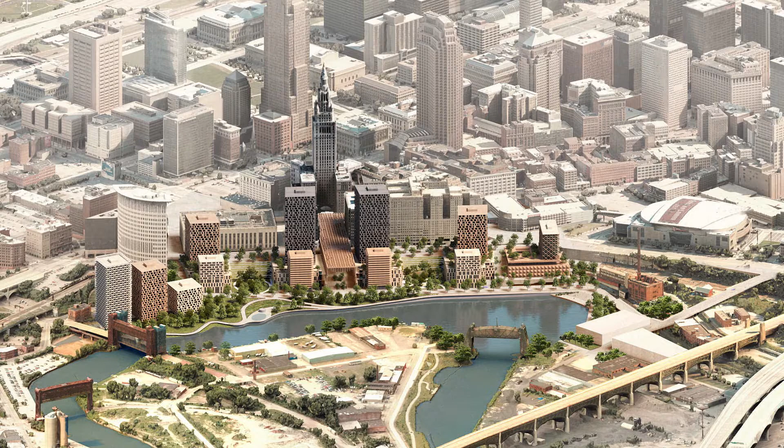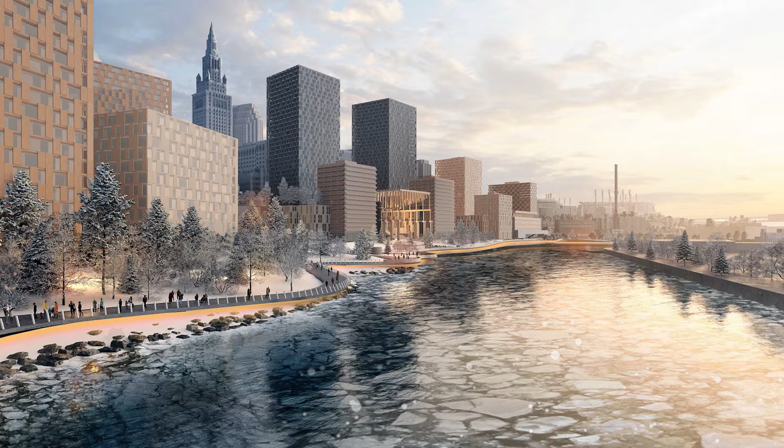I'm Jay Farner. I'm the CEO of ROC, which is the family office and support organization for Dan Gilbert, as well as the CEO of Rocket Companies. I've spent some time in Cleveland and had a great experience, but today is probably one of the most exciting days outside of that NBA championship, which is pretty good as well.

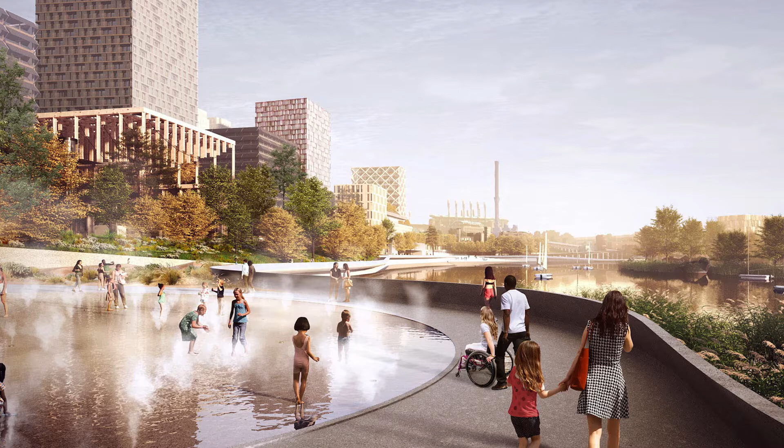As you probably know, our mission and Dan's mission is to make sure that we're having a positive impact on the communities where we live, we work, and we play. When I think about today and everything we're going to be talking about, that strikes exactly on our mission. We also have something called isms, if you know Dan - they're our philosophies that we live by. One of the most important is that you'll see it when you believe it. And as these gentlemen go through the plans for the riverfront, I think we'll all really start believing what the next phase of Cleveland looks like.

We've had a lot of excitement here since I can remember coming down in 2006 to set up our first mortgage office and recognizing how great of a city this was. As I referenced before, the NBA championship, the work we've done at the Higbee building and Tower City, but this certainly marks the step into a whole new transformational opportunity for us.

As you probably also know, we're doing some heavy development in Detroit. We've started and are on our way to building the second largest building in the state of Michigan, the Hudson's Tower. And as Dan likes to say, we are Lake Erie-centric, so Detroit and Cleveland are places that we like to be. Two great American cities, great DNA, smart, hardworking people, and these types of developments in these cities are long overdue.

But the reason I wanted to come down here today and speak with all of you and kick this off is that projects like the Riverfront Master Plan don't just happen. They are a result of a lot of hard work, not only by our Bedrock team, who I see many members of here today, but by so many other people that are in this room.

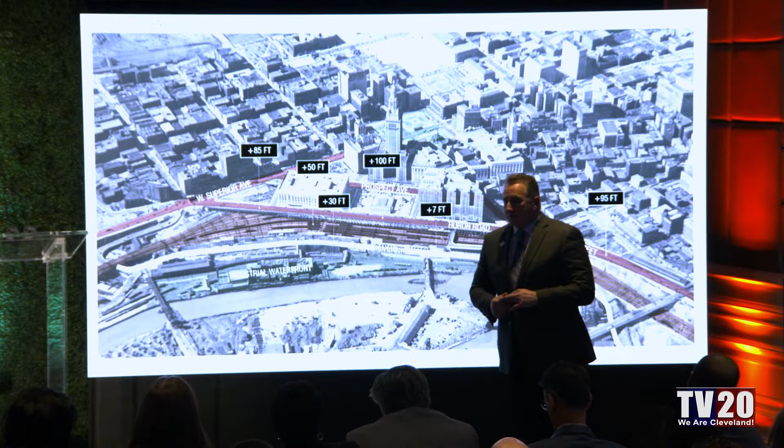And then lastly, as Russell mentioned before, you've got a lot of elevation challenges. You're starting out at plus 100 all the way down to plus 7 - those are elevations above the river level, so you're talking about 93 feet of elevation difference. Those are all challenges, and they set little platforms. You can see all the elevations marking up those little levels. Next slide.

So I think when we start, again, at that shore to core concept, you can see the federal channel. It is a federal channel, so we have to respect that. And then we have the bulkhead. It's still that industrial bulkhead, so we're going to look to improve that.

As you make your way up onto the site on this sectional view, you come into the parking lots and those industrial areas. Then you make your way to Canal Road, and Canal is a heavy truck traffic area, so that creates an obstacle there. As you're making your way further up, more parking lots, until you get to some of the core assets like Tower City, some of the parking lots, those assets, and then making your way further past Prospect, and then all the way to RTA, and then kind of the rest of that core area.

So that really defines the existing. Thanks, Jeff. Next slide, please.

So as we start to think about the 18-hour city and the 15-minute access, pulling a bit from what Joe just mentioned about the constraints with the infrastructure that exists now, I think we start looking at opportunities, right? As we looked at the communities and neighborhoods that make up Cleveland, we started to think, now we're coming into looking at our site, and what are some of these assets that we can use to help develop the 18-hour, 15-minute city?

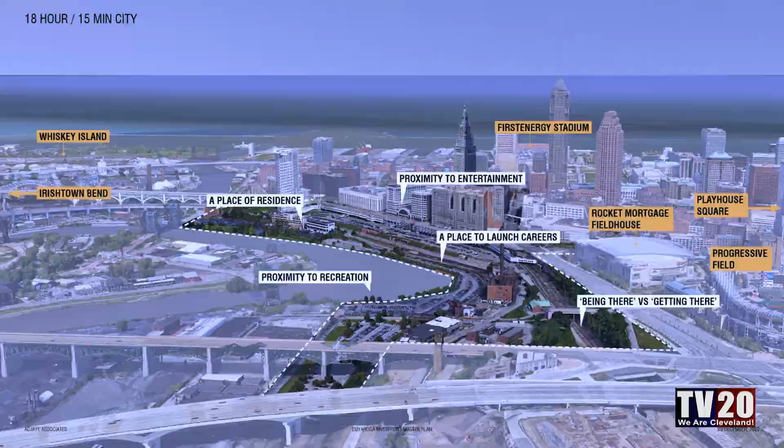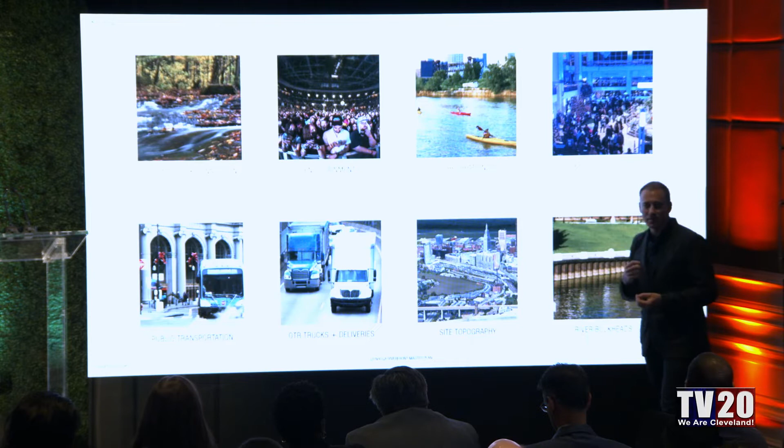Next slide, please. So on the top, I hope these are images you all recognize, but these are those assets, those places that you go to in downtown Cleveland. The national park is probably a bit out on the towpath, but these are places you all know and experience on a day-to-day basis. It's the fundamentals we're talking about here that we want to really explore and develop further. These are the opportunities we believe we can start looking at as we move into the next century.

And that starts with public transit, right? Can we start to really think about the RTA that exists in Tower City now, and then also the surface buses, and start to make better connections and decrease congestion, but get more and more people to come into downtown and create an epicenter that actually flows out or flows in from that moment? Strengthening that. I think the other thing is to really think about the commerce, the infrastructure of moving goods throughout the city.

We recognize Whiskey Island as having a port and the idea of what it means for leveraging the lake. How do you start to really think about where trucks are going to go and how that's going to work for the future? But then also thinking more at the neighborhood scale of FedEx and Amazon - where do those trucks go?

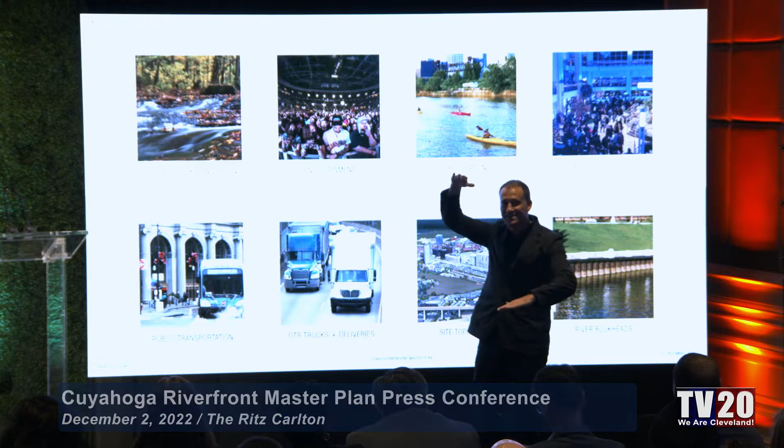How do they service and work through and not create barriers within the neighborhood? All while acknowledging the site topography, as Joe mentioned, going from 7 feet to 100 feet, we have a little constraint. But you can start to think that maybe we can really leverage that with the building and the developable parcels.

So that takes us down to the water's edge. And if we just start at our basic movement and think of 3,000 linear feet of bulkhead on a federal shipping channel, if we can start to make a change there and develop that, that should be our starting point to head back up to the top of the hill, which is the core, right?

So the shore to core principle that you all were part of in the vision for the valley, we think there's a strong part that we can pull off of that. Next slide, please.

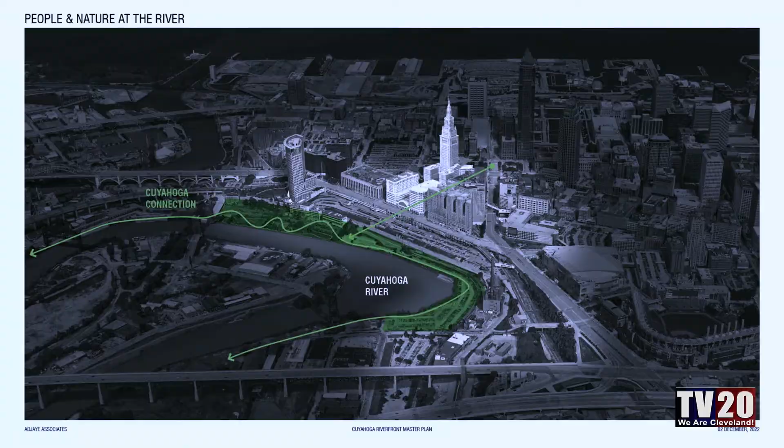What we're thinking is, let's make this a destination. So redevelop that federal shipping channel, maintain transportation infrastructure, but now to really start to think of that as public space, right? The idea of rebringing nature back into downtown not just as little segments or little zones, but really enhancing this to say 10, 12 acres of public space on the water.

And then using that as a moment to rethink Tower City. Using that to rethink Tower City and how do we turn Tower City as it is in retail and commercial, but maybe it turns a little bit more into what I'm going to call infrastructure.

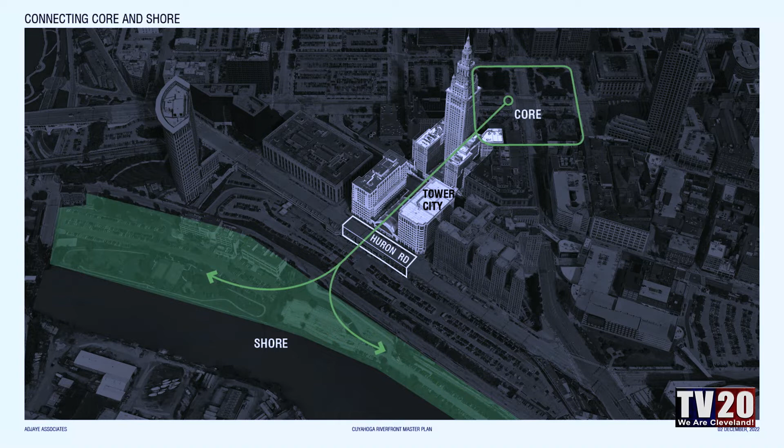And as the RTA, we develop connections with the RTA and the buses, now we have more public transportation coming through the building and more access that could occur from the shore up to the core, to the economic center. But with that, you can see we've identified here just that one obstacle that seems to be there, which is Huron Road, right?

As you leave Tower City now, you come out and it's the nice arch right onto Huron Road, and then there's the barrier of getting down, right? You can see the water, you just can't touch it.

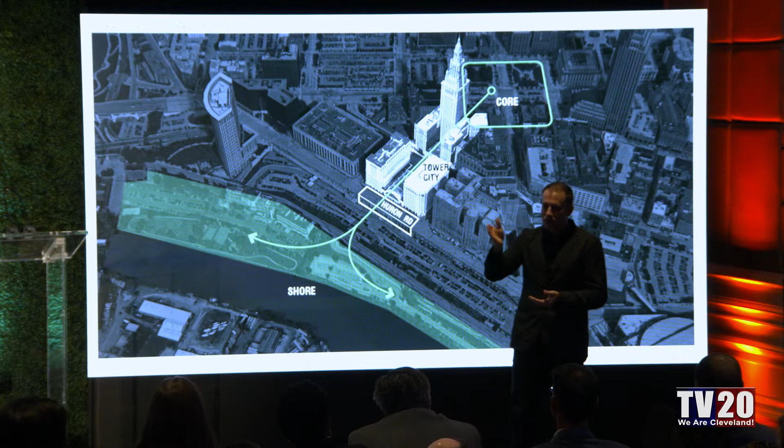So we've identified that as sort of a knuckle in establishing the basic premise of core to shore, shore to core, but really Tower City is going to be so critical to how we move this forward and rethinking its relationship to the ground. Next slide.

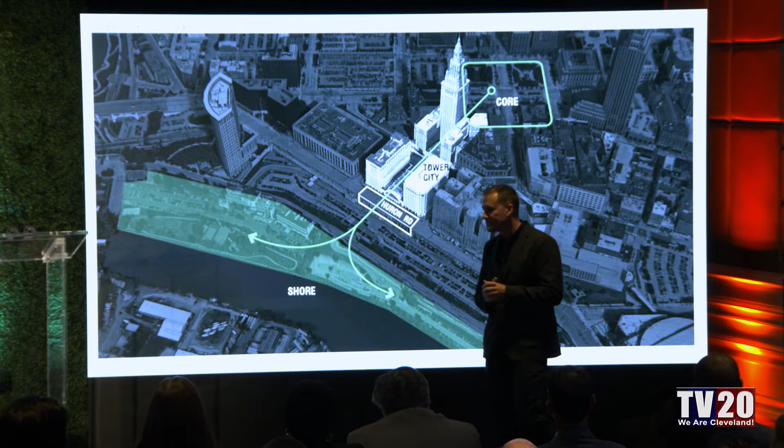So with that, David, going to hand this over to you. I'll be here. Perfect, and I can point to anything you want. Wonderful, thank you Russ, that's perfect.

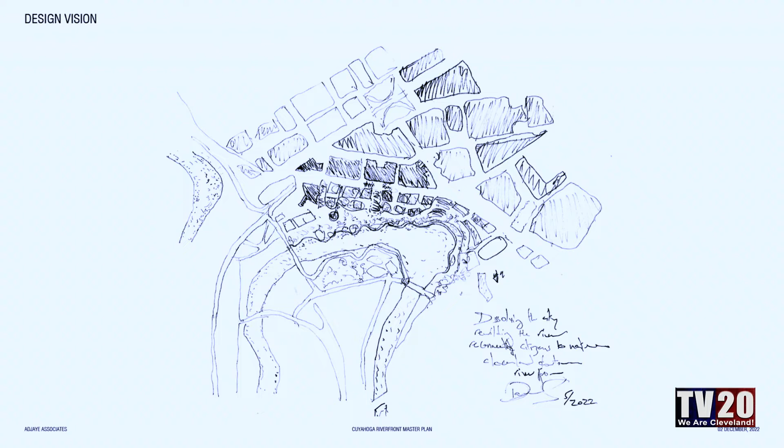So let's move to the next slide. So on the basis of what you've just heard as the framework and all the challenges, we started to really imagine this incredible opportunity, really this riverfront as an incredible opportunity to reimagine a 21st century downtown and a relationship to a river. And we felt that to really achieve the agenda of creating an 18-hour, 15-minute city, mixed use, commercial...

Residential, entertainment, culture, sports - to really create a microcosm of what makes the city as another core on this waterfront. We felt that we really needed to learn the lessons of the city, but to change the scale, to start bringing down the scale, and to think about the lessons of the 21st century in terms of infrastructure, building and construction, building new footprints that are much more sustainable, carbon neutral, and really start to talk about a dissolving grain that comes against this bend of the river, and the river creating a new waterfront that then dissolves the architecture of the city. Next.

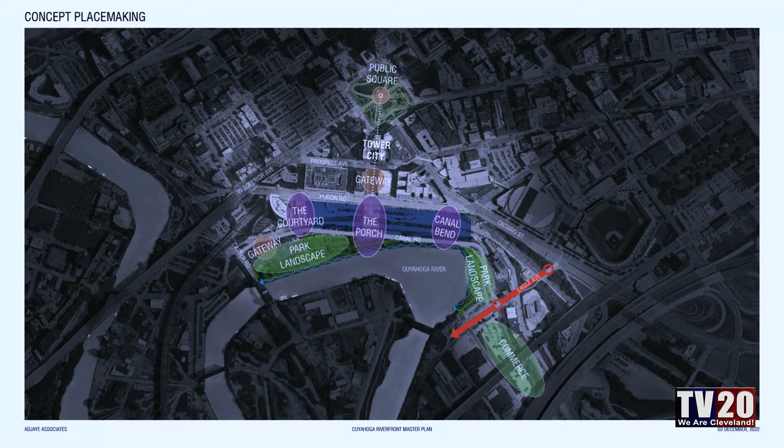So essentially, this is the core, the key diagram from Public Square. You can see right at the top in the north, coming through Tower City, creating a sort of gateway that comes down to what we're calling the porch, connecting you directly to the waterfront. Either side of that, east and west, creating another axis next to the courthouse, what we're calling the courtyard axis. It's a new infrastructure connecting to a park landscape, a very wooded landscape about the flora and fauna of the region and the joy you get in

parks off the river. And then at the eastern end, what we're calling the canal bend, that joint where the river bends, naturally creating an area that starts to transition to entertainment, respite, sport, and a closer relationship to the water as the elevation changes and gets closer to the waterfront.

And creating the infrastructure, Eagle Avenue, a new access road that connects to Canal Road, changing the way Canal Road operates with the waterfront, giving more space for pedestrians to get right to the waterfront, creating a new network of systems that support our ability to build the density we require to create the vibrancy we're all seeking for the waterfront.

Next. So this was the sketch that was just revealed earlier. Go to the next slide.

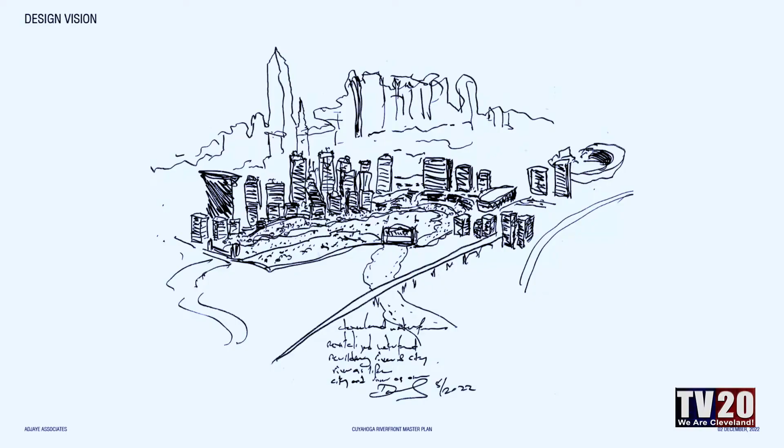Great. This was the sketch trying to talk about this new density, lower scale, more intimate, thinking about this in 100 years' time. It's an incredible interconnected network of residential, legal, legislative, commerce, culture, sports, a kind of microcosm of all the aspects of the city, hugging this beautiful riverbend and creating a new infrastructure that's interconnected, reviving the old infrastructure to become fantastic additional assets for the city.

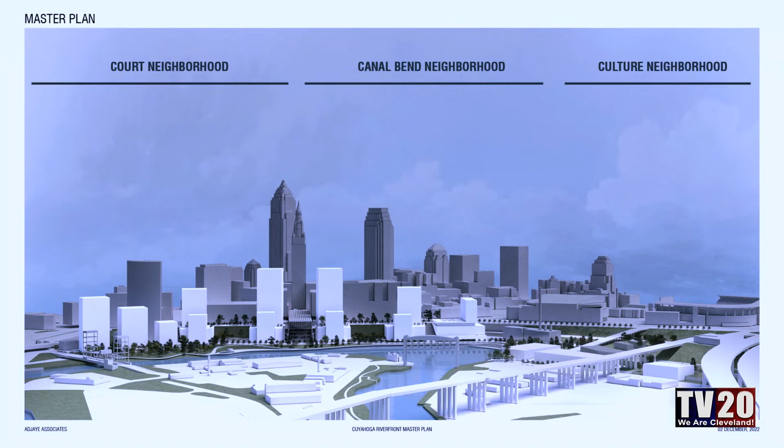And then how do we start? This is how we see it starting, with these four cuts that create direct connections, and these three neighborhoods: the Court neighborhood, the Canal Bend, and the Culture neighborhood.

Each of these being, as I've talked about, the Court neighborhood connecting to this new park forest, this new arboretum of the landscapes of the region, brought to a wonderful park that will show that diversity, be an amazing asset for education and respite, creating wonderful residential community around that, and existing communities using that neighborhood to also have that asset.

The Canal Bend neighborhood is really looking at the porch, which is Tower City, this new porosity, and the relationship to the water. Canal Bend, or the Culture Bend, with its connection to water sports, entertainment, public arena, a way to really come close to the waterfront and enjoy the asset reimagined.

Next. This is an overview of the site. We have a site of approximately 35 acres.

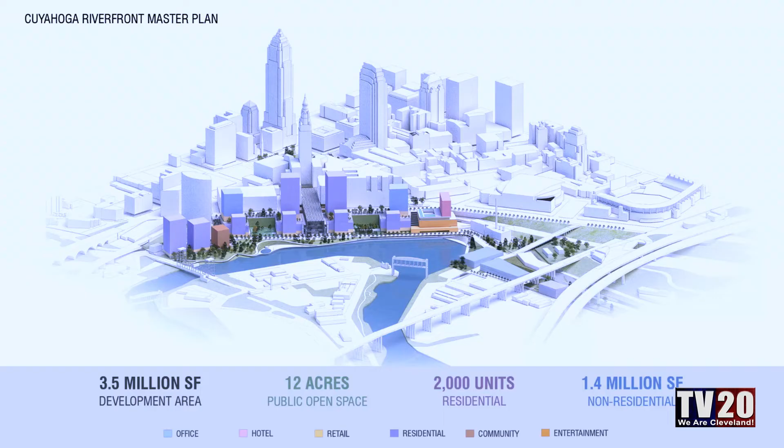We've dedicated approximately 12 acres of that to the public waterfront and infrastructure. We're looking at a development of about 3.5 million square feet in different scales and colors that you can see on the form, approximately 2,000 residential units when built out, creating this vibrant mixed community from commerce to residential to culture to sport, all around the asset of the reimagined riverfront.

Next. Mobility is critical to creating this new density.

We've been thinking about how bus transit works, wanting to robustly support that with new infrastructure in red, new bus terminals that allow for collecting without congesting Public Square and surrounding areas, supporting the new amount of people coming in, making connections to the RTA system and strengthening connections in the RTA system at Tower City. All of that creates a fantastic opportunity for pedestrian quality of life as you move from Huron and Prospect down to the waterfront, using Canal as a service road that services these developments while calming traffic and creating a friendly environment that allows public assets and landscapes to bring you right to the waterfront.

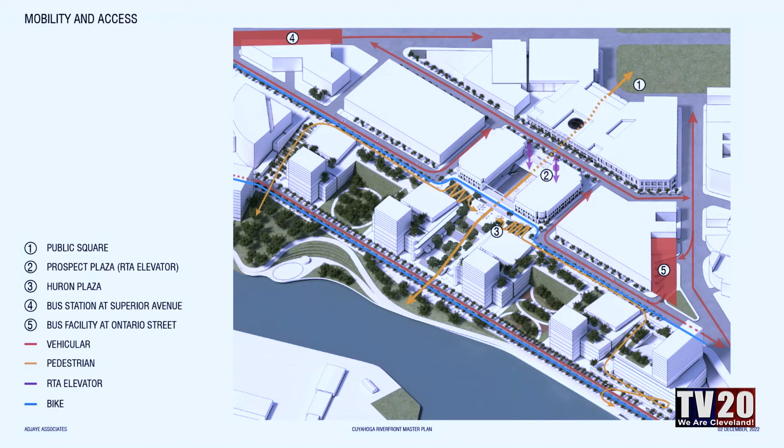At the heart of that is something unavoidable and critical in any development. I'm so happy that we can think absolutely critically about sustainability in this development. For me, one of the exciting things was this moment—this parcel of land is south-facing, east-west, sunrise to sunset.

It's a fantastic opportunity that allows us to create an incredible biophilic gem, the diversity and ecology that the planet and the soil offer, and the ability to create incredible gardens, walkways, and boardwalks that enjoy the asset of being south-facing, enjoying the warm sun even in the winter months.

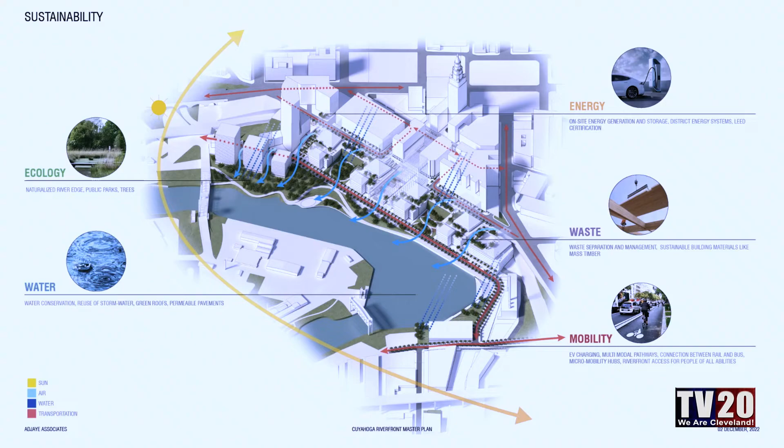With that, we also want to make architecture that is sensitive and understands the important nature of the asset we'll be making here, creating carbon neutral, as close to carbon neutral architecture as possible, using the latest advances in timber technology and CO2-reduced concrete. We're also thinking about smart energy coming to the site—the electric system, charging systems being part of the ecology—all working off the sustenance of the water, creating cooling currents and uplifts and an enhanced biophilic environment that will be fantastic for all.

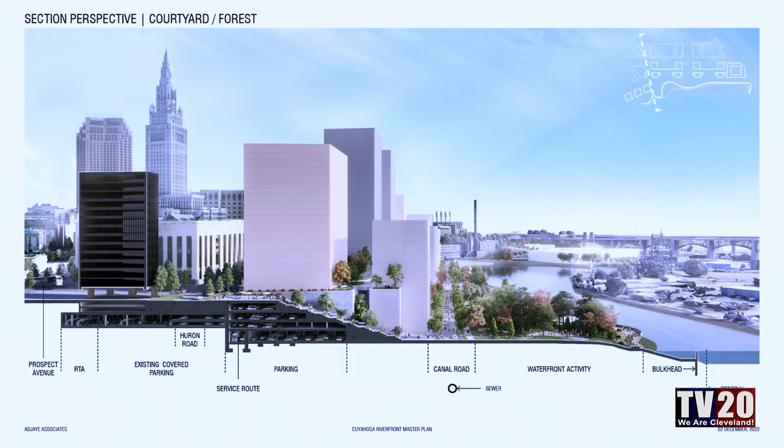Next, let's look at the sections, starting from the west. This is looking from the west, thinking about the federal courthouse—the beige building behind us—and the state office building to the left.

In terms of how we're working with the existing car park, we're creating a series of cascading terraces that go down, connected by stairs, ramps, walkways, and elevators that bring you right down to the elevation of the waterfront, 16 feet above water level.

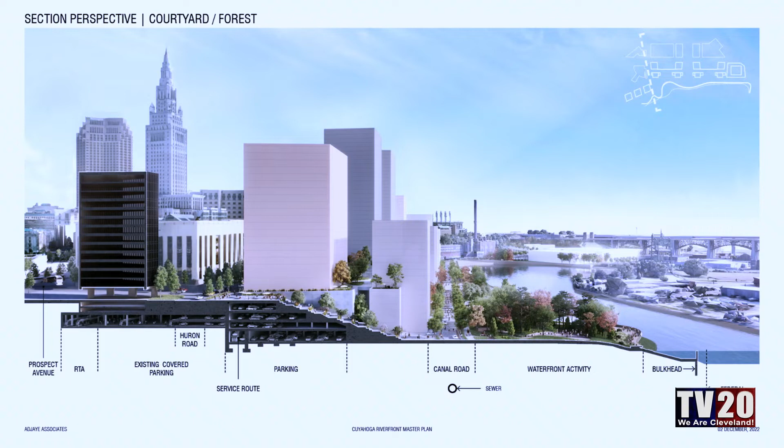These stairs aren't just steps, but destinations—little mini plazas, pocket urban spaces designed almost like a gentle hill that rises with landscape, allowing you to take your time and meander down, always getting a fantastic sightline and enjoying the south-facing sun.

Next, let's look at one of the pocket parks. This is a moment between the developments—one of the things we're excited about, because it's south-facing, is that even without physical connections, we can create these wonderful hill terraces with landscape.

Because we have the south-facing sun, we can grow so much plant life and ecology, and we think we can create beautiful garden walls that cascade and shield the parking structure, while also creating a solar reflector to amplify these pocket parks between the developments. They'll become intimate parks for residents and the community, shielded from prevailing winds, protected and nurtured within the biophilic, natural environment we're creating.

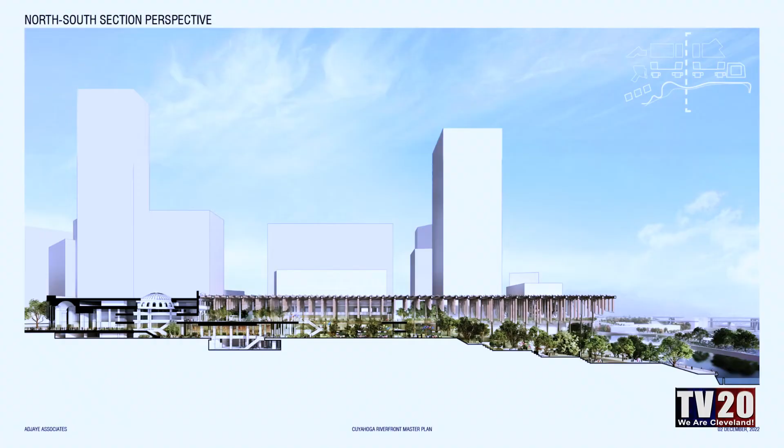Next, the key section that takes us from Public Square, the core to shore as it's been said, and really going through Tower City.

Tower City for us is really the new town square. It's about reimagining Tower City not just as a hermetic shopping mall anymore, but as a real town square that brings the community from all around into the heart of what we're calling the porch, connecting the public square right down to the riverfront.

We see this as a kind of new glazed infrastructure, very low carbon footprint architecture made out of timber, as we're thinking about it at the moment. It creates an inside-outside space that allows us to plant trees and create a powerful linear connection to the public square and right down to the waterfront.

So from public square, you're able to come through the existing Tower City and connect to this newly remade image of Tower City that cascades you gently down to the waterfront and brings you right to the water's edge.

The success of that really requires us to take away the perception that you're going underground as you're going through the sections and cutting through to the waterfront. One of those moves is at Huron, what we're calling the creation of Huron Plaza, making a cut on Huron that creates a new urban plaza, so that when you are coming through you have this moment where you see the sky, the sun, and the light.

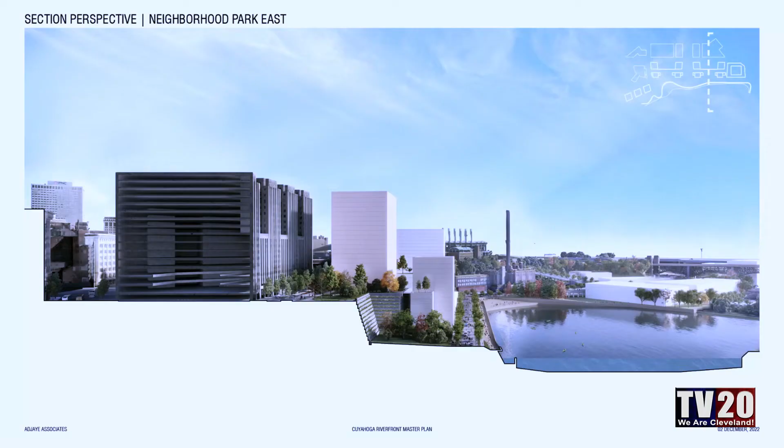This is looking at the other pocket park, same idea: the reflecting hillside landscape wall, or green walls, that create these beautiful, intimate park spaces.

This also gives you an image of how the waterfront boardwalk works, creating this space away from the canal, and creating a whole infrastructure along the waterfront. All this is set back from the federal infrastructure that's in the water, so we're not disturbing that. We're really working within the confines of that, creating this new world within the confines of the infrastructure we find ourselves in.

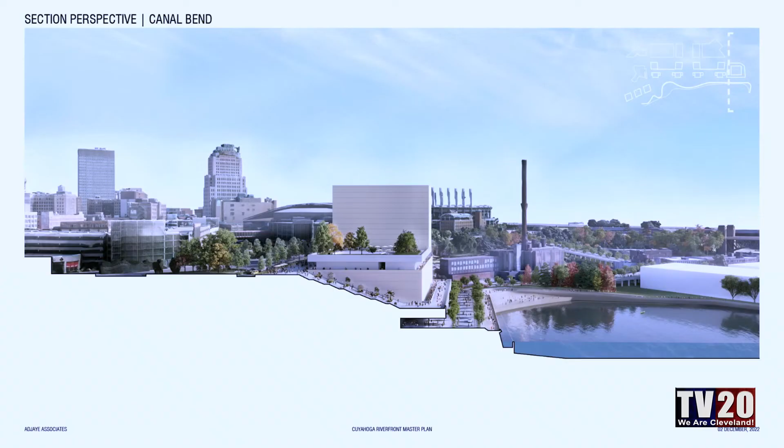Really, Canal Bend, right at the east, that moment when the elevations change, where the infrastructure of the car parks and the rail systems go ducking under the city, and you start to reveal the contours of the landscape. You're seeing the power stations, et cetera.

We're seeing that moment as a great opportunity to create another set of cascading stairs that come down to the waterfront, connecting that to entertainment, to the ability to create sports. The landscape becomes much more level and much more generous to be able to create areas of recreation and respite. Kayaking staging points could be there.

And really at the bend, seeing the opportunity of that elevation change to create a natural amphitheater, a cascade to the water, allowing citizens to be able to touch the river at that point, and really creating a fantastic natural amphitheater, which could really be a real asset for the city.

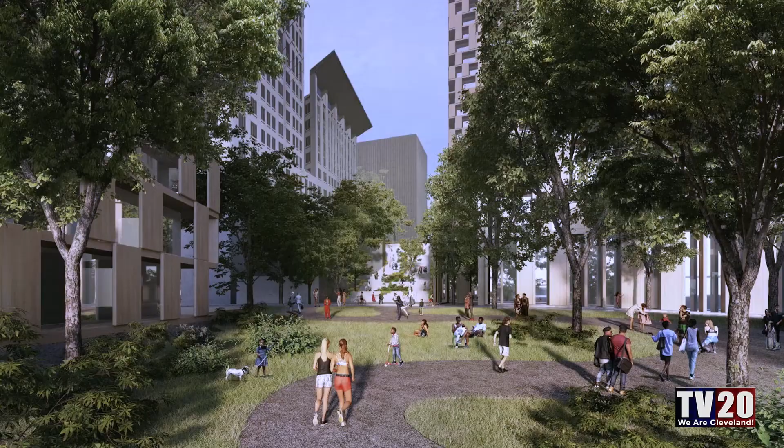Let's now look at some images of these particular qualities I've been talking about, starting back in the west near the federal courthouse. This idea of this wonderful park has a forest-like quality with an arboretum of different species of the region celebrated here with lawns and paths, creating a space that can be fantastic for education, but also for intimacy and well-being, creating a very rich environment surrounded by residential architecture as well as some of the legislative architecture that's existing at the moment.

But the idea is that infrastructure also helps us reconnect and layer our history with this new porch, creating a seamless system about reimagining this downtown area, which was an industrial infrastructure, now into a public asset that really creates another fantastic jewel for the city and its citizens.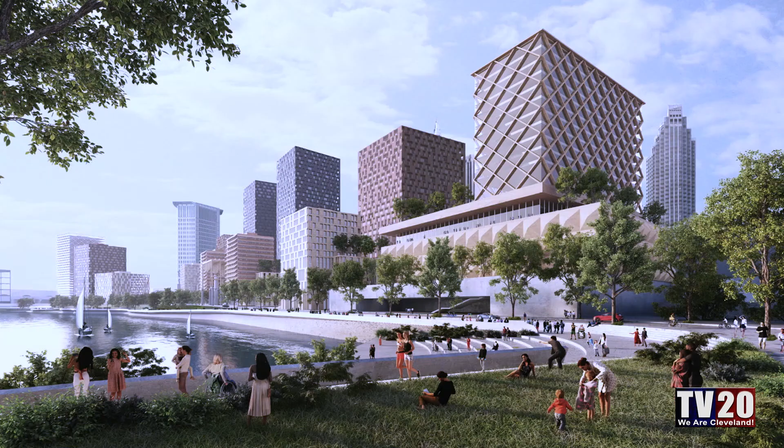This is at the Bend, looking at the great opportunity of the arena, that knuckle, creating an amphitheater that cascades right into the water. A fantastic moment for anyone to get right next to the river, seeing the boats and maybe fishing or whatever could happen at that point. And looking back at the idea of the lower architecture, the build out of different offerings of residential, office, commerce, etc. that can support the waterfront.

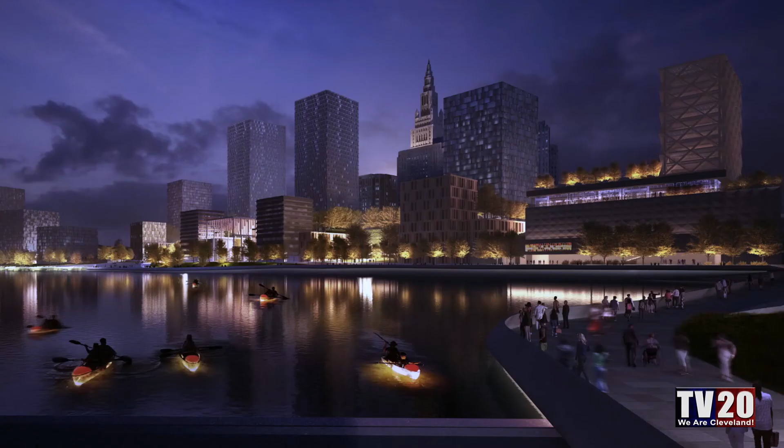Let's look at a night view, looking at some of the wonderful traditions of kayaking with night lights, and this becoming not just a daytime place, but an 18-hour city with vibrant evening life as well as day life, becoming a real asset for the community. Looking at it in different weather, we wanted to show that this is not just about summer - we understand the seasons in the city.

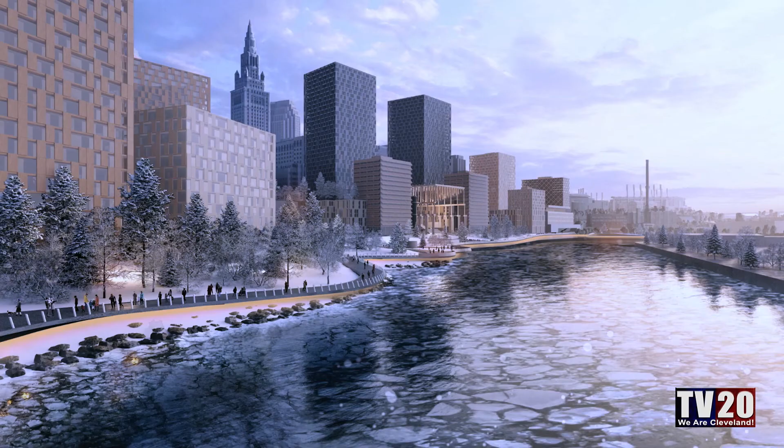And looking at a winter's day with this fantastic ability to walk on the south-facing waterfront, enjoying the sun when it peeks through the clouds, with this fantastic boardwalk with nature and water, and seeing this new imagined public town square, the porch, being part of the new way the city connects with its asset.

Thank you. Thank you, David. Thank you very much, pleasure. We'll take questions in a moment. I'd love for the council president, perhaps, if you could say a few words.

Well, good morning. Wow, wasn't that fantastic? Well, I first want to acknowledge a couple of my colleagues that are here today.